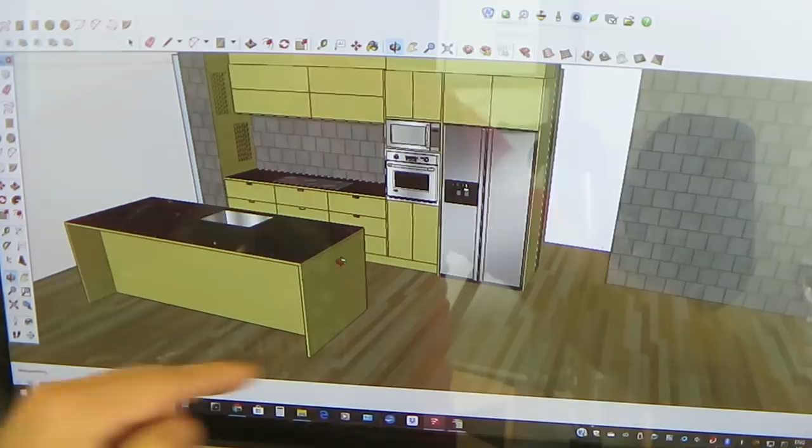Alright, so this is the kitchen that I need to design a table for, and I'm making this kitchen, so that'll be a separate video. But so we need a table that's going to sit on the end of the kitchen island here, and my client had seen the tables I had made a while ago out of the Rimu for the school that I did. And so I imported that image in, and she really seemed to like the steel leg design rather than the overall aesthetic. And obviously it doesn't really fit in the space.

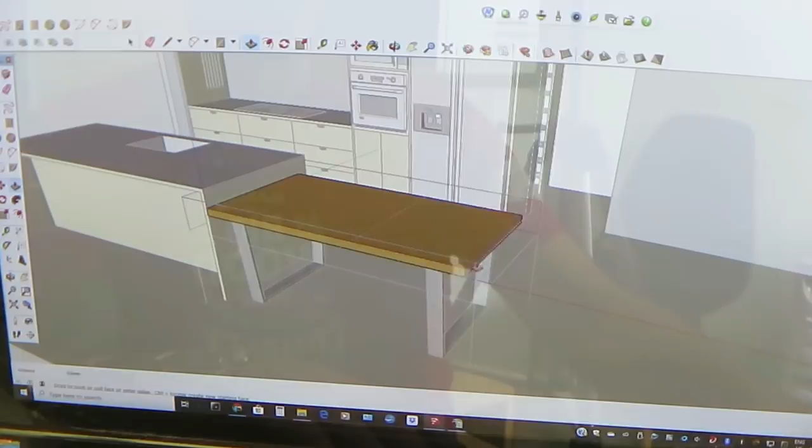So one of the criteria was that the table needed to be reasonably small. Essentially we ended up doing an 1100 by 1100 square. So if I scaled this drawing down, obviously that doesn't look any good either. It's just too much leg, really, for the size of the table.

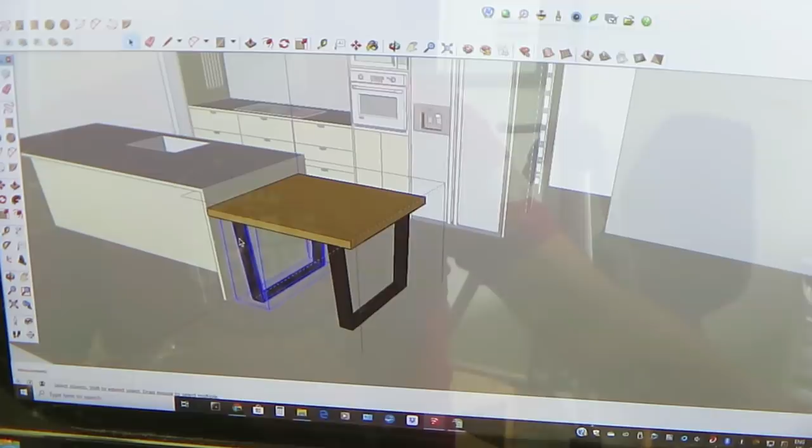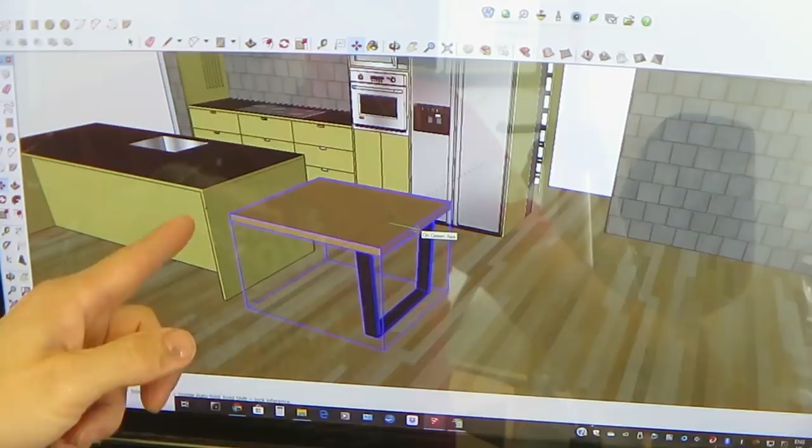So I thought what I could do is delete one of the legs and actually attach the table to the kitchen island, and then as an extension, which was part of the brief, it needed to extend when they had other guests around. So the whole table could extend away from the island when needed, and I was thinking maybe some kind of contraption where I used big drawer slides to attach all of this onto the kitchen island. But it was just going to be heavy. You're going to end up scratching the floor, and one leg just didn't really look right at all.

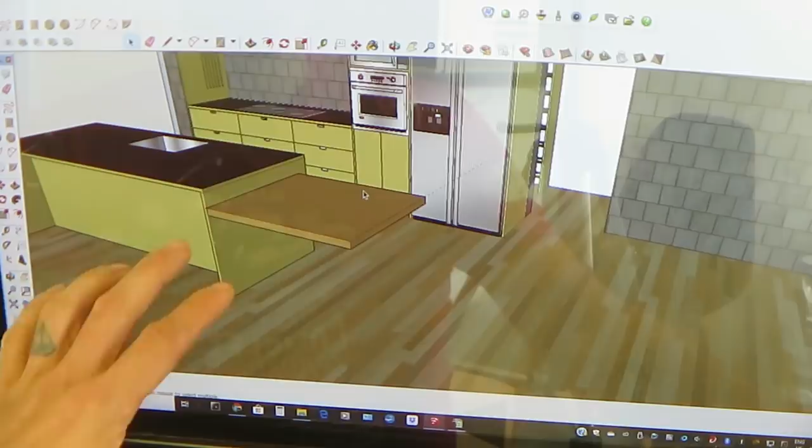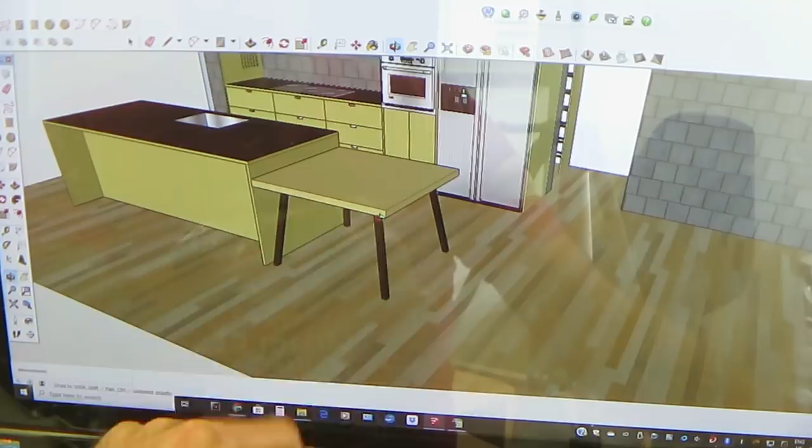So I thought what I should do is just delete this leg and then go for something in the same style but much more slender. So got rid of all that. I ended up designing this table where I just have a square top and 40 by 40 square steel legs. So it looks nice and slender. I think it's in the right proportions for the space. But of course we need to make it somehow an extendable table. So that's where I started designing how this was actually going to work.

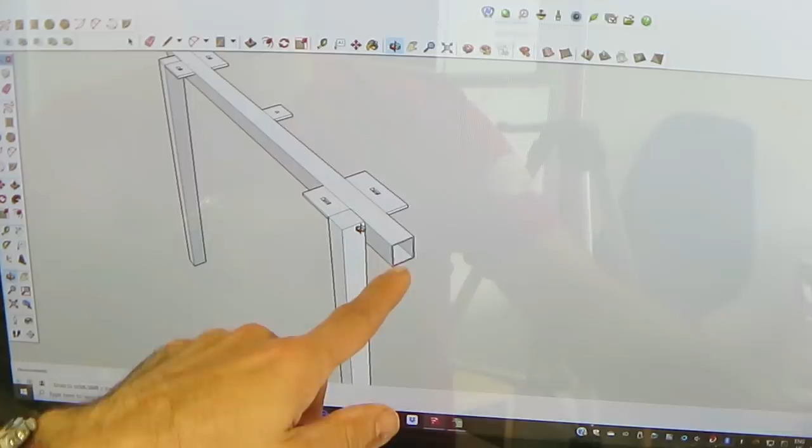So this is a leg assembly that I came up with using all box section. The legs are on like an 8-degree compound angle. I've added a center bracket that will be screwed onto the underside of the ash top, and then obviously put some slots in to allow for the table to move. So I'm going to be running this steel section across the grain to hold the tabletop flat, and I thought I'd take advantage of the fact that the square tubing is in fact a tube, and we could slide in an extension piece into the end of that.

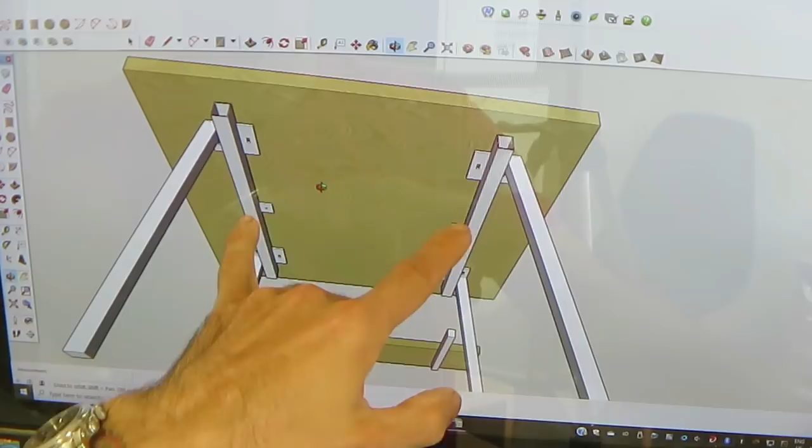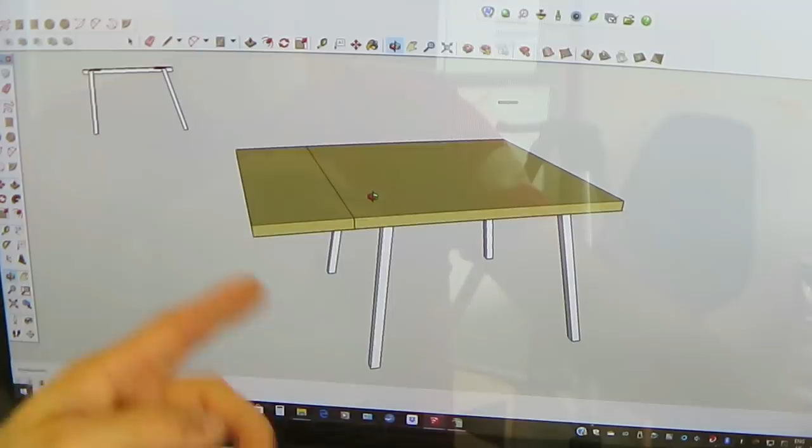So after I drew that onto an actual table design, I came up with this. So essentially this is what we're going to have, with two leg assemblies separately attached to the ash top, and then I could slide in the extension on each end, and so the extensions can be kept in another room, the garage most likely in this job. So when they have people around, they can pull the table out and put an extension on each end. So I thought that was a pretty good compromise. The client really loved the idea of how the table was going to work.

So what I did is send these drawings along to my steel guy, and I got him to fabricate that up. But obviously while he was doing that, I could get on with making the timber parts.